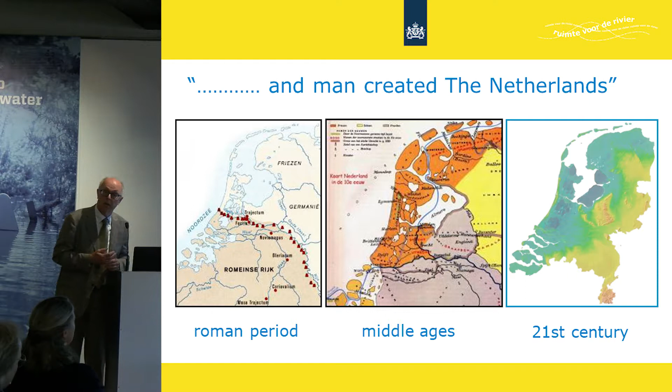And I don't know if you visited the Netherlands one time by airplane and you land at Schiphol Airport, that used to be a lake, and it's located below sea level. And you don't realize, but that is really the fact.

And the graphic shows that by drainage and by all these new techniques, you see an effect on environment by subsiding of land. A large part of the Dutch country is of peat, which is from mosses and which contains from nature a lot of water.

And making this land accessible for agriculture meant drainage, but by draining, it dries out, and even more, you get a chemical reaction which produces CO2, and which leads to a chemical burning of the soil, and it leads to subsidence of land. And at the same time, we see the sea level rising. So that gives a picture about the problem we have.

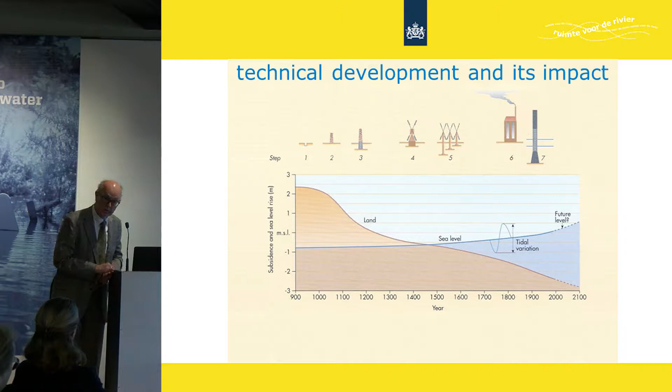We have a lot of technology, but at the same time, our land is sinking, a large part, and the sea level is rising. And we also expect more water through the rivers. And I think this is a striking graphic that shows that if we would not protect the country with dikes and dams and dunes, more than 50% would be flooded on a regular basis, and that's the area where the most people live, but also where the most economic production is. So that explains why this country has been investing for centuries a lot in flood protection.

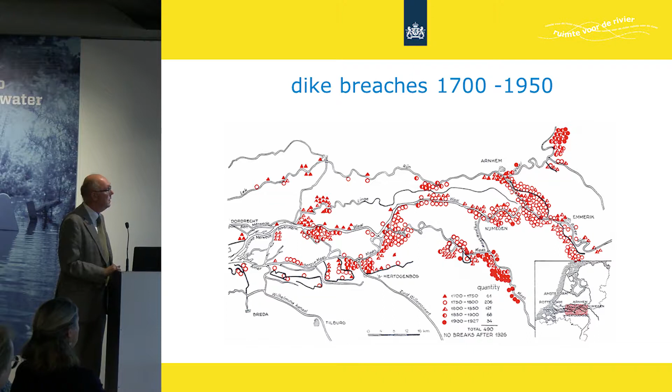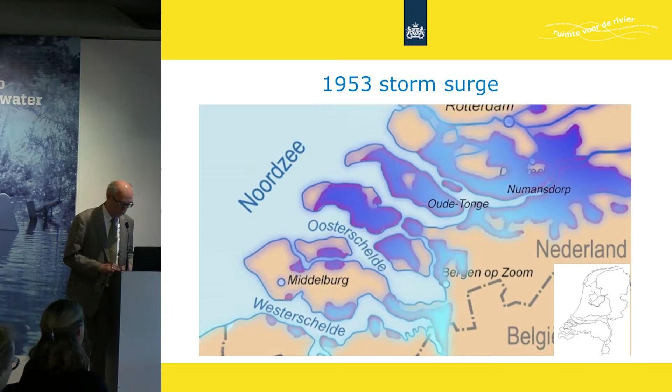1,800 casualties, people drowned. People were waiting for days on their roofs to get rescued in a time that the government in The Hague didn't realize at the first moment, because there were no helicopters, there was little communication, a really other era. But that led to a reaction that we would not let it happen again. A few pictures from that time, from the storm surge and the disaster, and it didn't happen afterwards again.

What happened, and you see the little graphic down below, is that the government decided over a 40-year period to control our coast by building storm surge dams, by building big dams, by heightening and strengthening dikes, with the effort that 1953 would not ever happen again.

And after a lot of protest, this dam, the Eastern Scheldt storm surge barrier, was designed with open doors, so the tide could come in to the sea arms and nature values could be maintained. So in a way, a start of another way of thinking how to deal with nature and water.

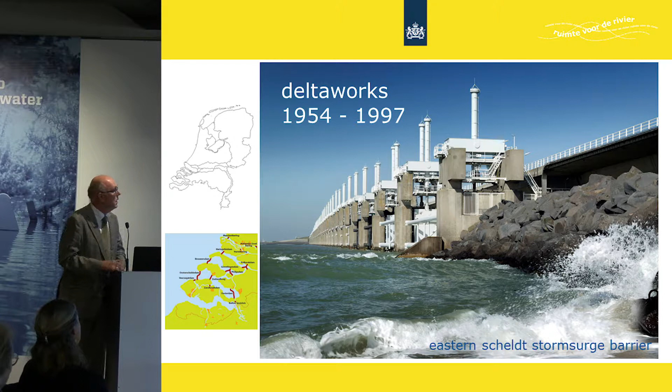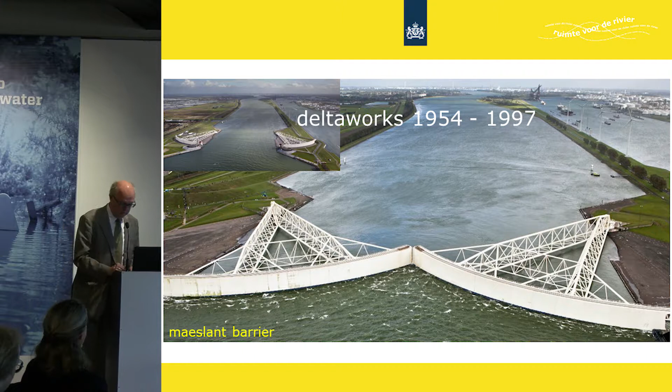And in fact, to give you an impression, the arms of these two doors are as high as the Eiffel Tower in Paris, and this kind of construction is followed in many places in the world. It's an idea of a new way of thinking how to deal with these kinds of threats.

And then in the early 90s, the Delta Works were finished. And we were so arrogant to think, Holland is finished. We are protected from flooding. It will never happen again. And then we were surprised in 1993 and 1995, because in our idea, the threat came from the sea. Our experience was storm surges. We put locks on the front door, but we forgot the back door, which is the rivers. It's not so much water maybe and not so devastating, but anyway.

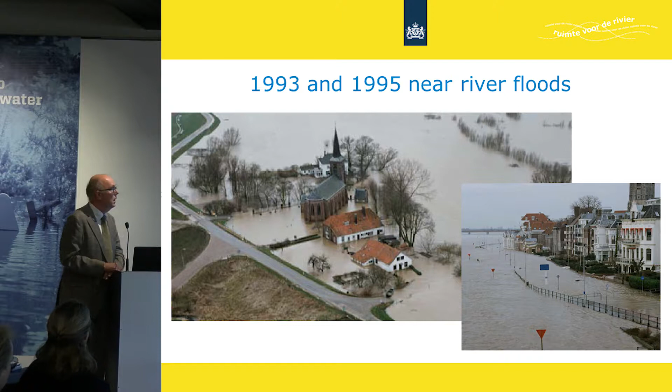And that led to another program for flood protection, Room for the River. And Room for the River also shows another way of thinking. For centuries, by building dikes and heightening and strengthening dikes, we were fighting against water. We wanted to keep the water out. In the 90s, we had some experience with nature restorations in the river.

An idea started from the United States that if you give nature space and time, it will develop. And we experienced in the river by doing so that all kinds of species that were extinct came back. But we also discovered that nature has in itself a function and a role in flood protection. So the idea and the experience of the ecological environment transferred to the civil engineers, who said two things.

I just mentioned the weak peat area in the western part of the country where the land is subsiding. The civil engineers said, is it possible to always, every time, heighten and strengthen dikes on weak soils? Every time we make it higher, it gets more weight and it sinks in. So maybe it's not such a wise strategy. That was the first idea. Maybe we should look differently at the rivers.

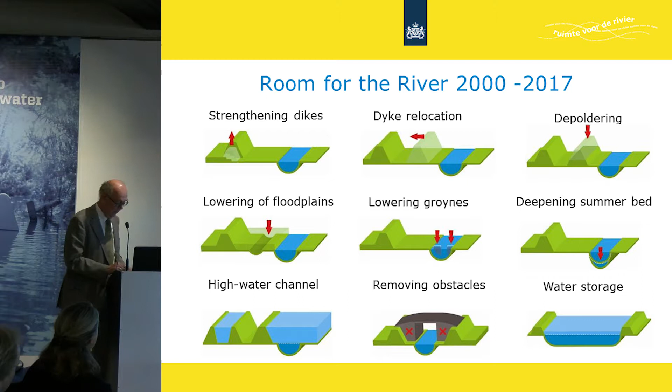It's a program of 34 projects all over the river, which ends this year. We started in 2000. It ends this year, and 2017 refers to water safety having been established, but it doesn't mean that all the projects are finalized as a whole.

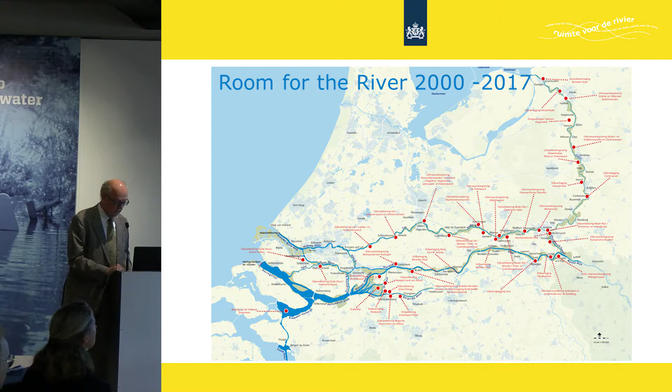And to give some examples, and I was very happy that we had a little bit also about the economic effects. Room for the River was decided upon in an economically very positive time. So the local and regional governors said to the central government, you know, we agree that you try to find room for the river for flood protection, but if you do so, please take the opportunity to improve the spatial quality of the river. A lot of things in the past went wrong.

The cities that tended to develop with their back to the river, pollution, building in floodplains, maybe try to make it better. And this is one of the examples, the River Park Nijmegen, and this is before Room for the River came. A bend in the river, and also a history where the town got closer to the river, and one of the few opportunities in an urban area to make space for water.

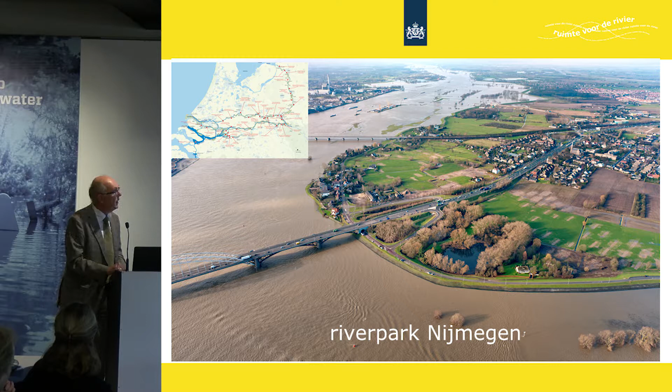And what we in fact did, and I show you on the next, this is the design, is making a side channel. There was a lot of opposition to start with. 50 houses were there and had to be demolished, so people opposed very much. But the idea was that if you design it well, then it can be part of town, and the ambition of Nijmegen to also develop on the other side of the river would be made possible. So after some years in discussion, people started to see the quality of the idea.

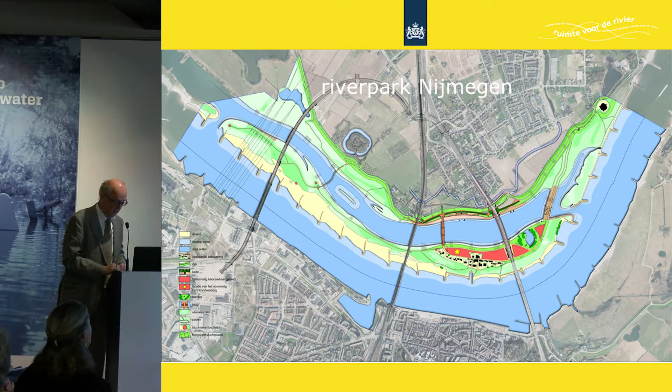The municipality really wanted this development, and I'm happy to say, because this project finalized some years ago, that when I go to the area and talk to people that live there, they look back and they say, you know, it was really a problem, and we had a big discussion, and we were against, and we had a difficult time for 10 years, but the area has improved. And this is how it looks now.

And when there is high water, the water can get in. There's water the whole year round, but it doesn't flow normally, and it flows only with high levels of water because you want the river to be maintained as a channel for shipping. And we built some new bridges and a new quay.

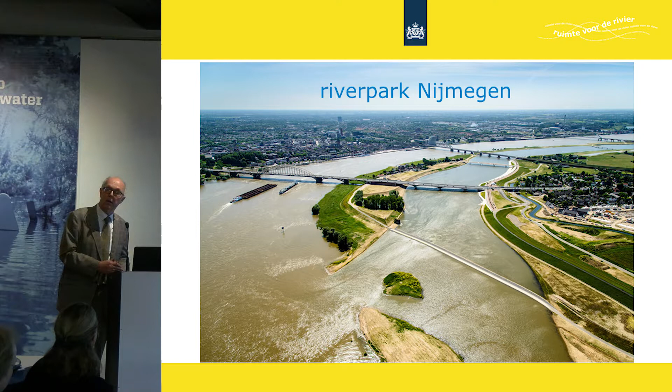And what you see now happening in Nijmegen is that people really cross over the river now. And there is a lot of activity on the new side, on the side channel side, with theater, with leisure. And I'm happy to say that the municipality of Nijmegen now refers to this project. They said we were with our back to the river, but now the river is the new center of town.

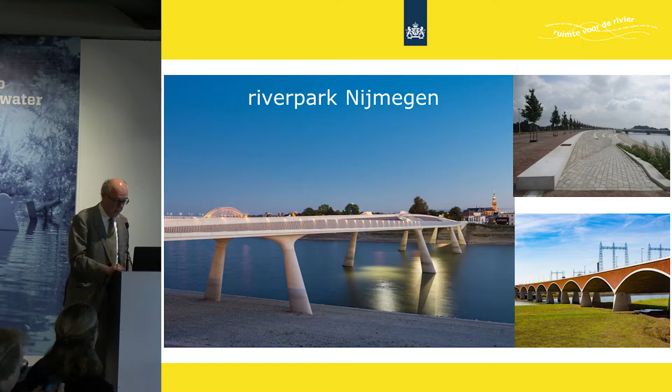And here are a few pictures of the architecture, of the new features in the area, which I think are of quite high quality, and we were very happy to be able to really build good quality elements that will last long. And this is an example in an urban area.

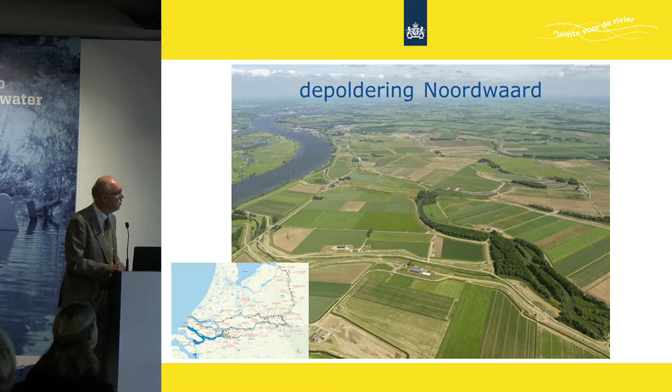And this is another one, the Polder Noordwaard, near the Biesbosch in the western part of the country. A big area which had been flooded in the 15th century, and what is left is the Biesbosch area, which is a freshwater intertidal area, never reclaimed again. This polder has been reclaimed, and now we decided to give it back to the river to be able, in times, to have a shortcut to sea. And this is the design of that project.

And you see what we did, and it was quite a debate. In every project we had debates with people to also get knowledge about the features of the area, the history, the way people use it and their ambitions, and try with spatial quality to make a combination between what is necessary for flood relief and what is important for people to see a new future in these areas.

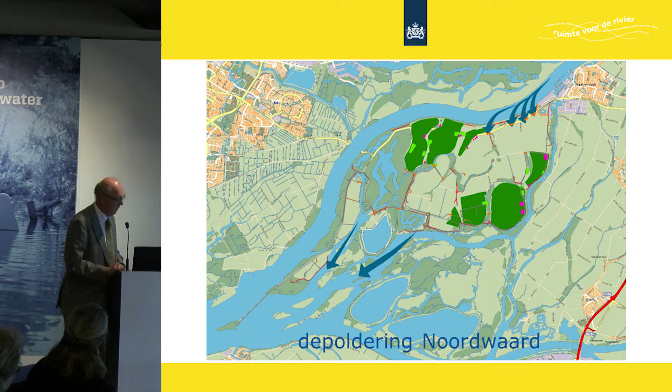It attracts a lot of people because now you have a nice way to enter this nature conservation area of the Biesbosch with bicycle lanes we made, with footpaths, which were not there before. And nature reacted immediately. When this project was realized, the osprey and the sea eagle decided to breed there, and that was on national news.

And that's also a nice example: we had high water in the beginning of this year. It was not dangerous, but it attracted a lot of media attention. And on the radio we have the traffic news, like where the traffic jams are. And to my surprise, on the radio it said that there was a traffic jam to this polder because people want to experience flooding. So they didn't see it as a threat, they see it as something to experience. So I think that's a good thing.

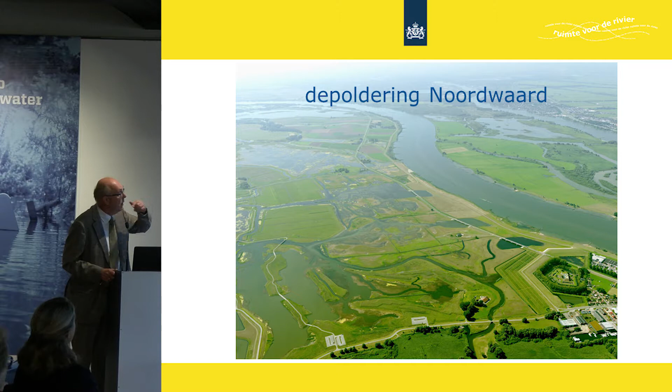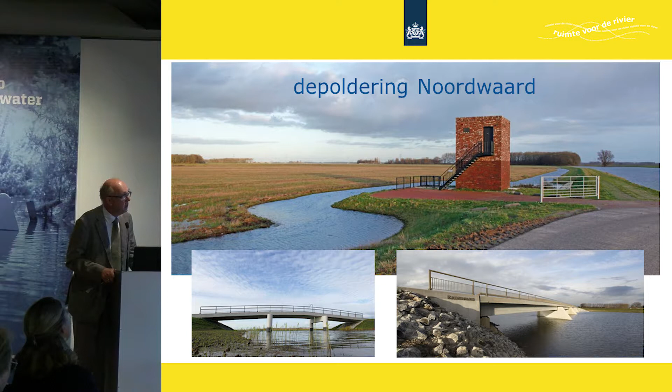Well, some pictures of the Noordwaard, a lot of bridges built, also with architecture, a pumping station, where we also try to keep a little bit of history visible for the future. You see the bricks on top are different than on the bottom, and on top they are reused bricks from the old farms that had to be removed. And the line between also shows how high the water can get. And it didn't happen yet.

Then, the future challenges. Well, I talked a bit about the Delta Works and the storm surge of 1953 and the 1,800 casualties, and that we are a very vulnerable country with the largest part located below sea level, and a country where, despite all of that, since 1953, not one person died by flooding. So I think our problem is not technique, it's not knowledge, it's not attention, but it's awareness. I think Dutch people generally are not so much aware about the location they live in, so that needs a lot of attention, it gets a lot of attention.

But then again, we really feel that climate change is happening. And when we started Room for the River, our government not only said we need flood protection by making room for the river, but they always said we want to make a first step to climate adaptation. And a first step means that a second step has to be done. And we expect even more water running through the rivers.

And this September, our Delta Commissioner, we have a Delta Commissioner specially designated to this kind of problem, who directly advises the government, said we were thinking about sea level rise in a century of 1 meter, but maybe we should expect 2 or 3 meters. And if that is the case, we have a lot of work to do if we want to stay living in the Netherlands. So sea level maybe is rising even more than we expected.

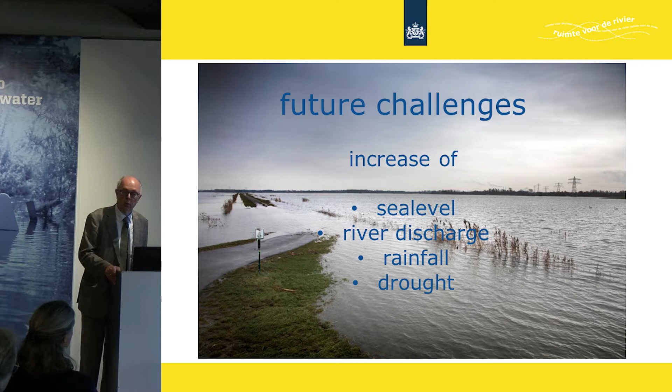So the idea we had after the Delta Works that Holland is finished, well, we don't have that idea anymore, but it shows that working on water safety and quality never stops. So what happens in future? Well, Room for the River is just nearly finished, and another program already started. We discovered by new technology and new information that the dikes are maybe not as strong as we expected. So we started to strengthen half of the length of our dikes at a value of 7.5 billion euro until 2050. And then again, our government in September announced that the next step in Room for the River will be starting, called integrated river management.

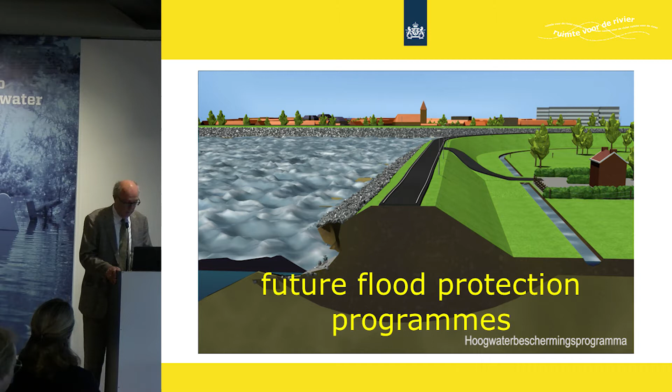So you can never stop working with water. And then what I think is interesting from Room for the River is, because of the paradigm shift, I think we now have many more tools to address flood risks. Before, for many centuries, the reaction has always been heightening and strengthening dikes, and now our toolbox has extended.

And this is a picture I think is interesting of the water square in Rotterdam, where the urban development is designed also, if necessary, to receive water. In this place, they can store, if necessary, 1 million liters of water. And that means basements will not flood and damage will be controlled beforehand. So combination of functions, I think that's the challenge we are facing, to see how we can live with water in cities, where we tended to focus on rural areas.

And that's why I liked your presentation very much, because I see in the pictures that in this city, I think you achieved a very good relationship between the city and the river. And I think that's a challenge that is to be picked up more widely.

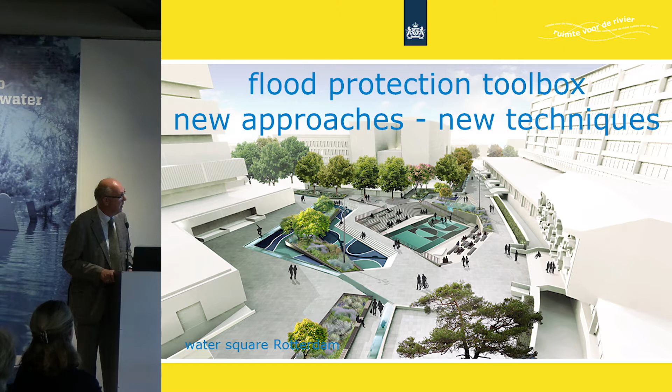Also new techniques in the dikes. It's a very interesting time where all kinds of innovations and techniques are evolving. I was very happy to talk yesterday with some young people here that also have these new ideas with new technologies and new ways of using computers, because there are possibilities, I think. It is not necessary that strengthening dikes leads to higher and broader dikes. There are also technical measures. Now, these are a few examples.

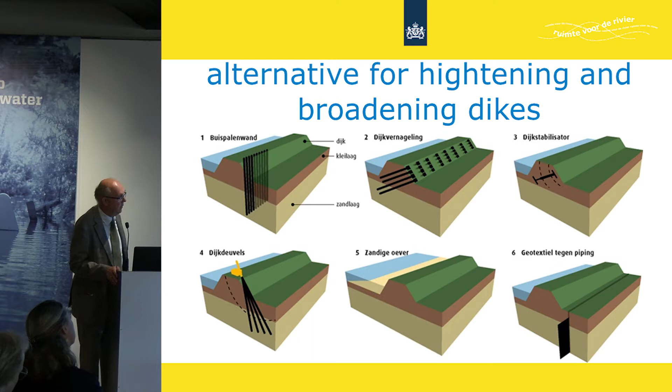This is also an interesting example. The Polder Noordwaard, which I showed just now, we had a debate with people living in this old fortress, who said, you know, I don't want a dike in front of my house. We were planning to protect them, but they didn't want to. And we had such a good debate that we were challenged to think of other solutions. And then we said, why is a dike as high as we make them? It's not only the level of water, but it's also the waves made by wind. So if you can get the waves out of the water, then the dike can be lower.

Well, that's a technique, and that's a technique from nature, especially an ecological technique. In the tropics, the mangrove trees. And I always make a joke when I stand here. So we planted this row of willow trees that really get the energy out of the water, and the dike behind that and the fortress is lower and doesn't show as much as the dike.

I'm visiting that place many times with very many delegations. And I remember I told the Asian Development Bank people, you know, that is really the Dutch trade genes we have, that we copy the Asian mangroves and sell it back to the Asians again. Because I was in a presentation of Deltares, our leading institute, and they said, you know, this can be a solution for Indonesia. I think, yeah, it comes originally from Indonesia, probably. So that's the tradesmanship of the Dutch.

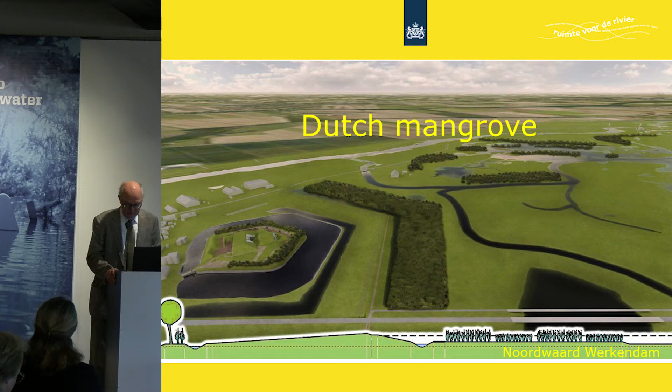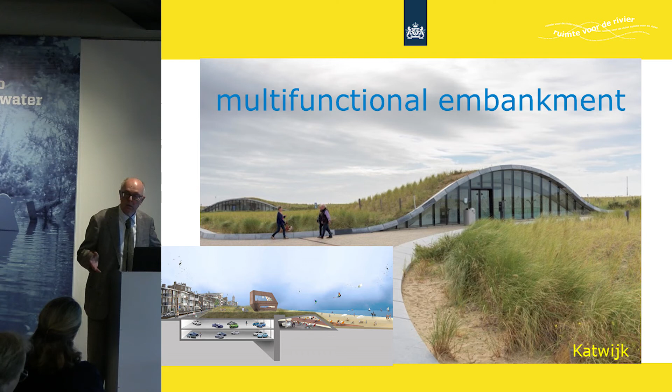Another nice example, I think, of combination of functions is at the coast, because I talk about the rivers, especially because that is really what I'm into. But the coastal zone, of course, stays very important. And there were weak spots that are repaired. And here at the town of Katwijk, they made a new dune. But why not combine it with, in this case, a parking lot? So there's parking spaces in the dunes, and it looks very natural. And it gives the flood protection safety you need.